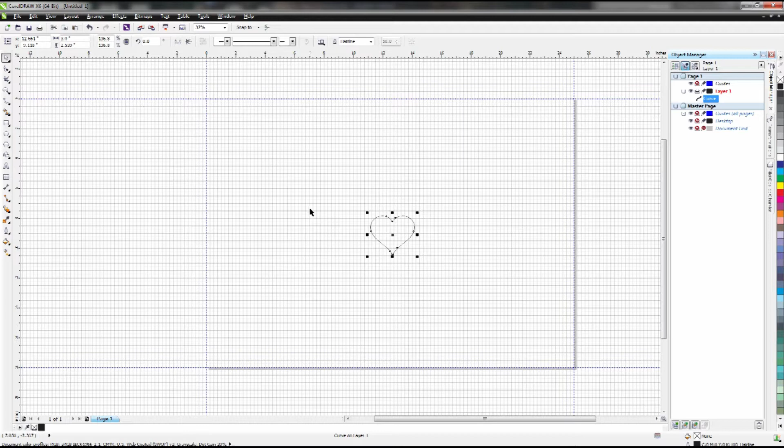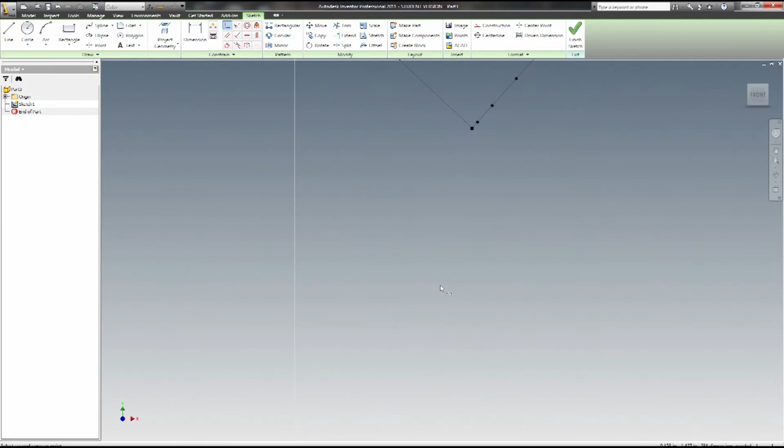But anyway, what I'm going to do here is open up and import the AutoCAD file. And there it is. Now I want this to be constrained. I'm going to say it's going to be here. Here... oh man, it took everything.

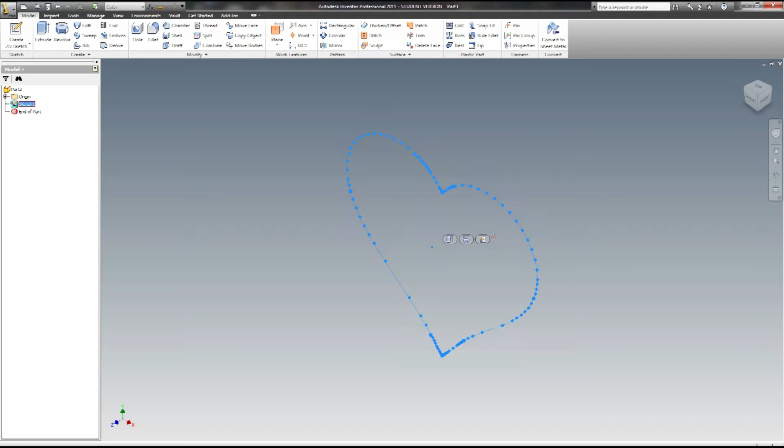Okay, that didn't work. I know what I need to do. So I'm going to finish the sketch to show you a problem. The idea here is to extrude this into a solid, but I can't, because for some reason when this vector was imported from the DXF file, it came up as an open shape, not a closed surface, I guess. So I've got to go back to sketch, and I have to use Sketch Doctor.

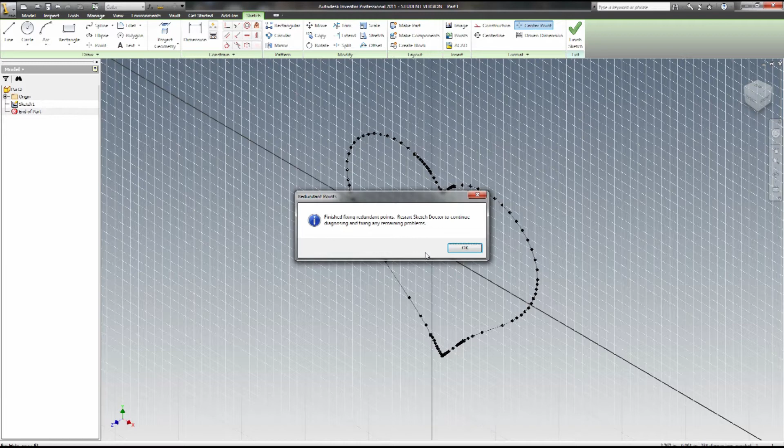I'm going to diagnose it. Just check for everything. It's going to find a bunch of missing items, so you just do next, finish, and now it starts asking if I want to add the points, and of course the answer is yes. But this could be hundreds, so I'm just going to press the Y key, and it'll keep going until it's done. I don't think it was hundreds in this case, but I've done it where it is hundreds, and when that happens, it takes a while pressing Y, Y, Y, and Y.

Okay, so what I'm trying to do here is move this so that this node is here. Really, it's not that important, but I'm kind of picky, so let's just do it. I have to deselect this, and now I'm going to constrain it.

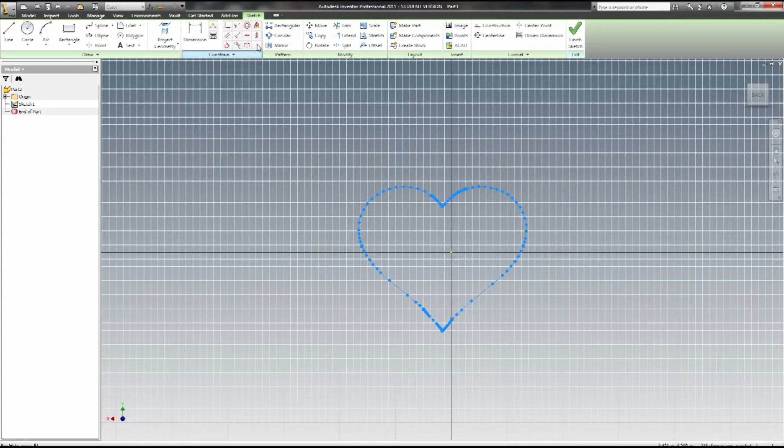This guy here. Man, that didn't work either. I don't think that's gonna work, so I'm just gonna forget about it. Now, if I want to extrude this, now I can.

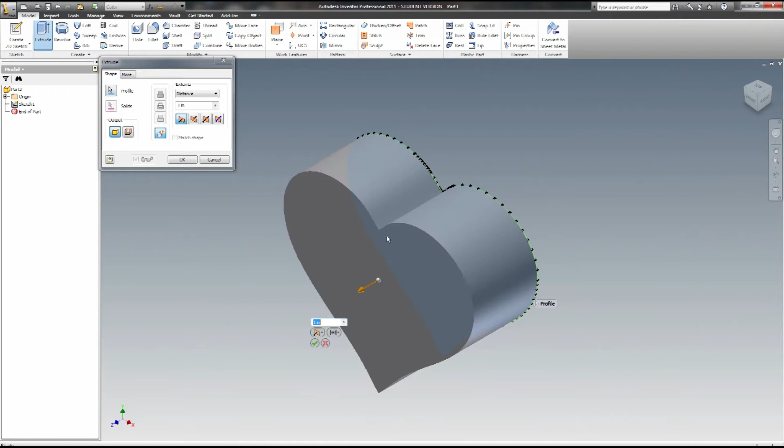Now I'm gonna say 0.25, because most likely that's the kind of aluminum that I'm gonna work with. Quarter of an inch.

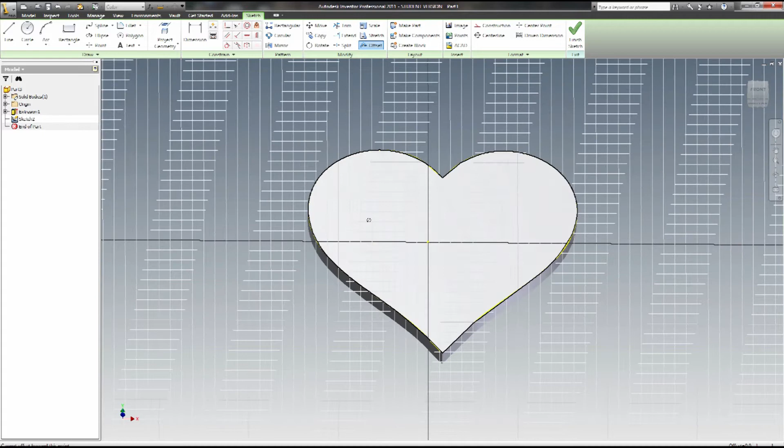Now, one thing that I would have wanted to do here, but unfortunately I cannot, is to create an offset. It doesn't let me. Apparently the shape is too convoluted, so I cannot create a smaller heart. That would have allowed us to make some fancy figures, but unfortunately it's not possible. I don't know why. I would definitely like to know why I cannot do that, but I guess it's because of the complexity of the shape, because most likely there are so many vectors in here that I guess it doesn't like it.

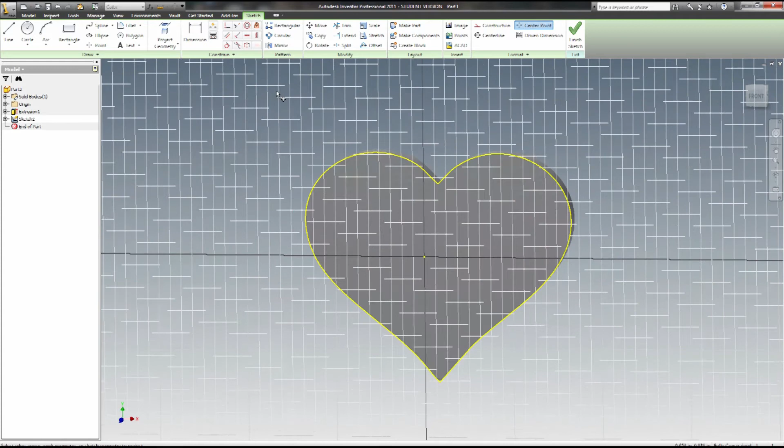Let me try something real quick just to see. I don't think that's gonna do it. Yeah, I think it's too complex.

Well, here is our part. I'm not gonna do much more here because this is just an example, and I am really not an artist. I don't even know if you can do super duper complex stuff with a bunch of curves here in Inventor.

Now the next step is basically to export this. Do not do a save as. A save as is not gonna give you the file format that you need. We need to do an export, and we have to choose IGES, or I don't know if any other format works. I have been using IGES, but maybe other formats work as well.

I have saved my file, my IGES file, and now I'm gonna go to SprutCAM. SprutCAM is the CAM, basically the computer-aided manufacturing.

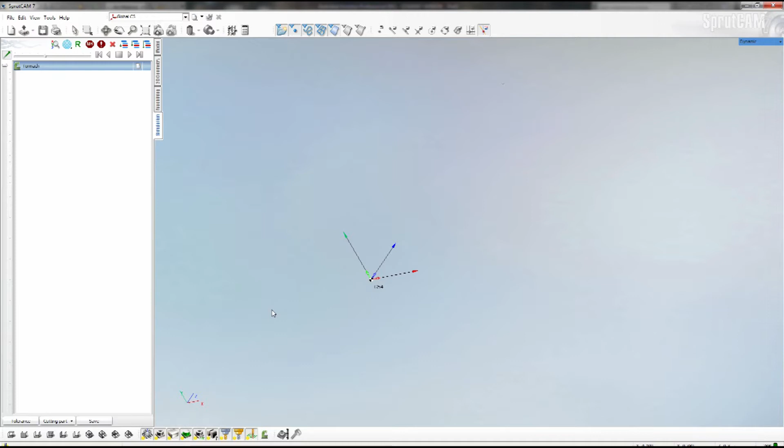So let me take a pause here to answer a very important CAM question. One of the questions I see the most out there on blogs and forums is, what is a good CAM software to use? What is a good computer-aided manufacturing piece of software to use on my CNC endeavors? The way I see this, there is no such thing as a good CAM software. What there is, is good CAMers, individuals capable of extracting the juices out of the CAM software they have chosen. The reason I reach this conclusion is because 3 years ago, before I started tinkering with CNC, I had this notion that the CNC software was magical enough for me to input one model, press one button, and voila, get this humongous list of G-code that will get the part manufactured.

Today our CAM software will in fact take a model and you'll press a button, but in between you'll have to fill a bunch of tasks to get the job done. For example, you're going to have to choose tools, algorithms, advances, speeds, feed rates, lines, curves, processes, and a bunch of parameters that must be selected properly for the CAMing process to work correctly. So this software, where we just press one button and the computer does everything, does not exist today. But it will be available in the future.

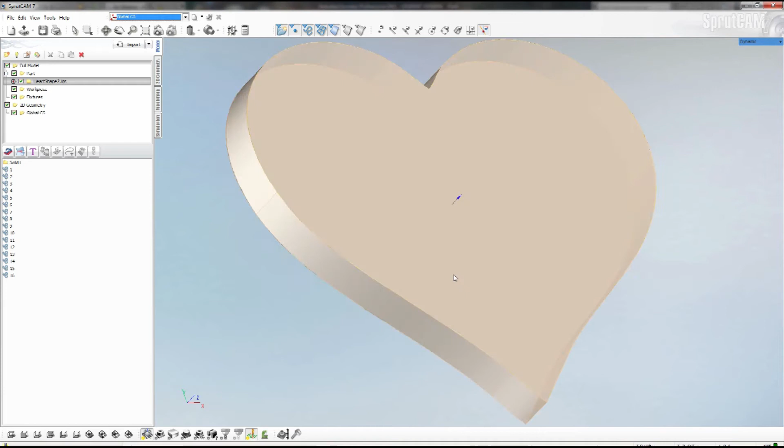Okay, I have imported the heart. I am not certain if I'm supposed to do this, a sewing, a sew operation. I think when you load the part, it's already complete, but I'm doing it anyway. I usually do it anyway, but whether it needs to be done or not, I'm not certain.

What I do need to do, however, is find my origin, my 0,0,0. And to do that, sometimes you have to do stuff like rotation, or you may even need to scale the part, or maybe you have to mirror it.

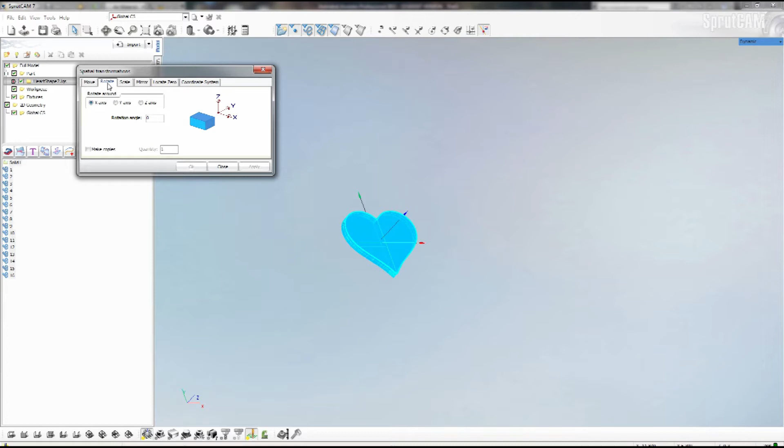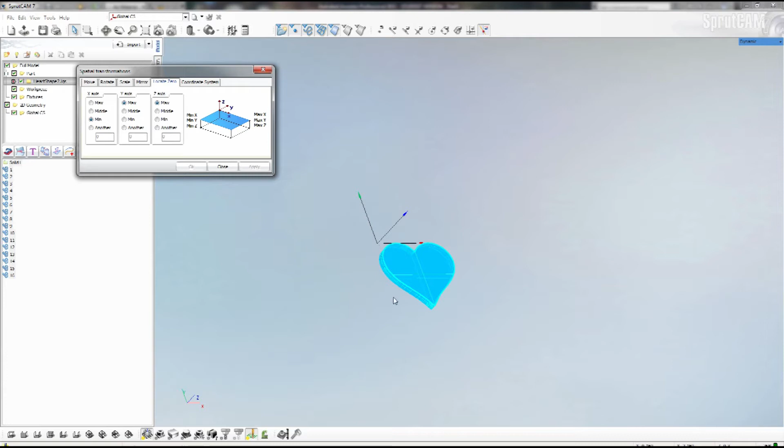Most of the time, the only thing I do is rotation if needed, if it's standing up and I want it laying on the vise, then locate the 0. I go for min, max, max, so my 000 is on the top left. The reason I like this origin - most people like the bottom left because then everything is positive, X positive, Y positive. It's kind of odd that I'm choosing top left because now I have negative Y and positive X. The only reason I've chosen this origin nomenclature is because this is what I'm accustomed to on the laser.

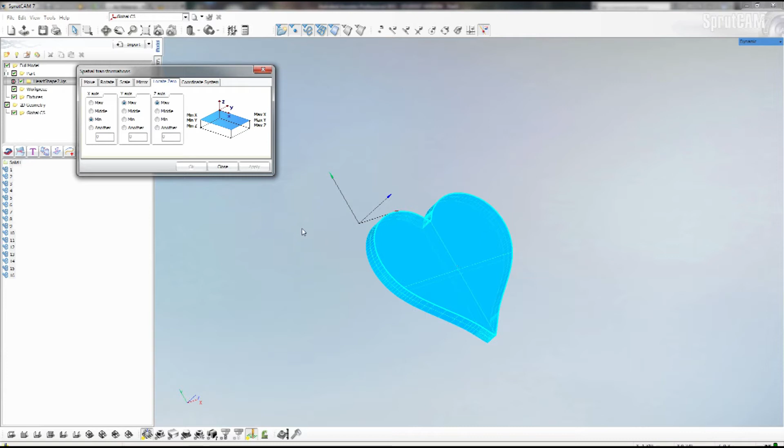On the laser, just because of how it's built, everything is positive on X and negative on Y. So I just inherited that, but it's up to you - you can even put it on the center if you want. There is no wrong way here. As long as you follow the origin from your cam into your machine, you'll be fine.

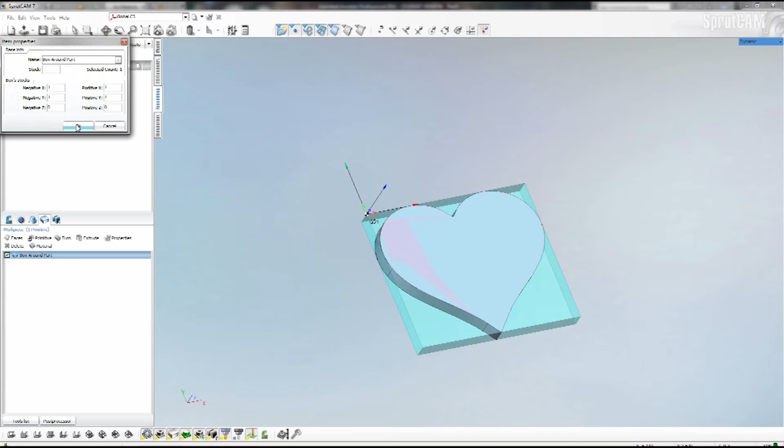So we're done here. Now I'm going to start by adding a workpiece - there's already one, but it's not going to let us see a lot. I'm going to go into workpiece and say primitive box. That didn't do much, let me adjust this. I think I have to add it and then double click, and now I can change the stock. I don't want anything on Z, I only want it on X and Y. There we go, now we have a nice piece of aluminum.

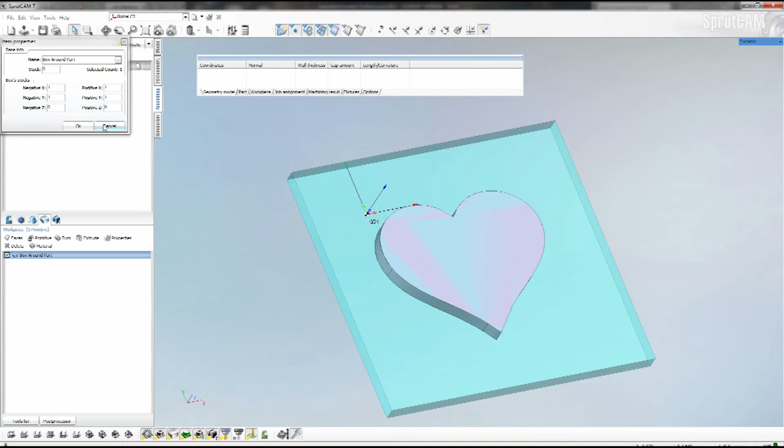Do notice that my origin is still here, so in theory you could move that if you wanted, but I know what I'm going to do, so that's no big deal. The only reason I added this workpiece is because I wanted to see the operations as they go across the heart shape, and without it, it becomes harder to see. But my actual workpiece isn't going to be this size - let's see how big this is with the measurement tool. I imagine this must be a 4x4 or something like that, but that's irrelevant.

The first thing we want to do is create a process for finishing 2D contouring - that's the process that's going to carve the contour of this shape. Now we need to actually select the shape. Well, look at that, it selected the whole thing - that is amazing. Basically you just double click on one of the lines and it selects the contour, then you go to your job assignment and press curve.

And that didn't work because for some reason it's trying to measure. That's intriguing, let me remove selected. Okay, let's do this with shift. Man, why is it measuring? That is the kind of stuff that really bugs me about this software. I don't want to measure, damn it. Okay, let's see if it works now. It doesn't.

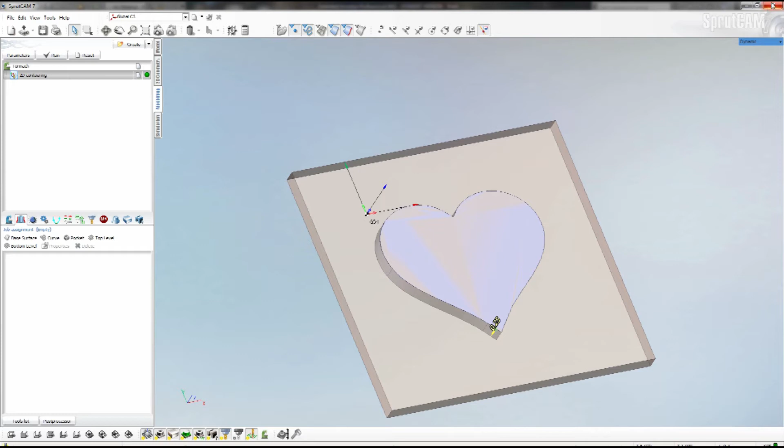Well, this pretty much means I'm going to have to close this and start from scratch because the software is doing something stupid which I cannot understand. So I'm just going to close it, and I'll return when I've gotten back to this point and we're ready to proceed.

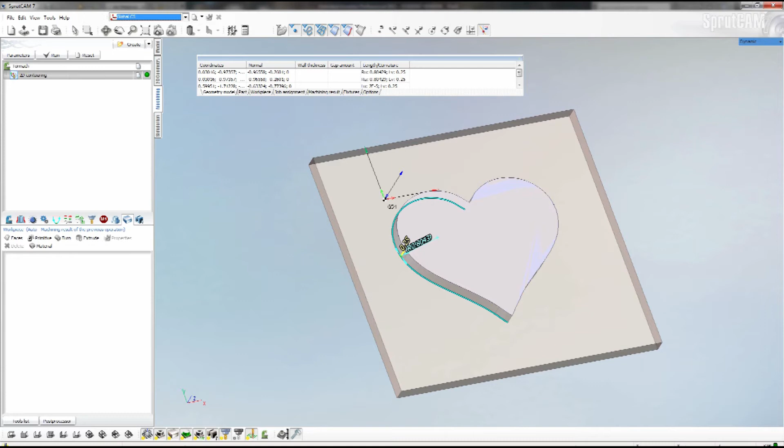All right, I am back, and in theory I should be able to select this. Man, it keeps doing the same thing - what am I doing wrong? You know what I think the problem is? I think the problem is this sketch.

Let's delete this sketch. I'm going to export this again and import it again, so I'll meet you on the export cam once more.

Alright guys, I am back. This is the third time I'm trying this, and I actually believe that the fact that I had a sketch on top of this that had nothing was messing up the cam software. It's kind of preposterous, but I think that was the problem.

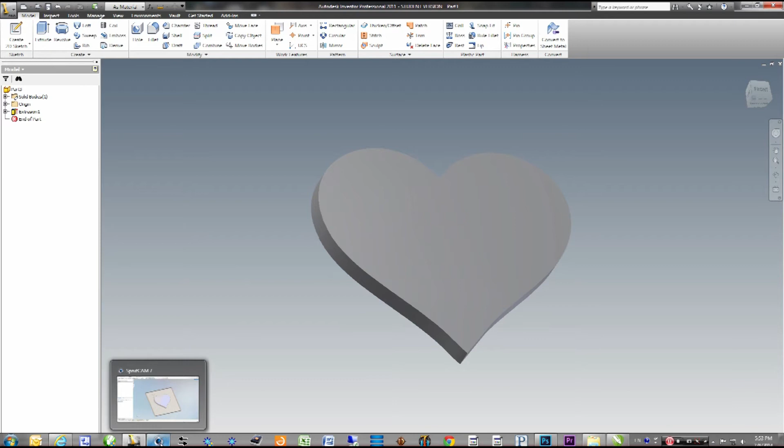Let's give this a try. So I'm going to create my 2D contouring, and now I'm going to select this, press control, select this, and now work curve - bam, now it works. Amazing, that truly baffles me. It seems like the lines on top of that meaningless sketch were confusing the cam software to this level. I mean, wow.

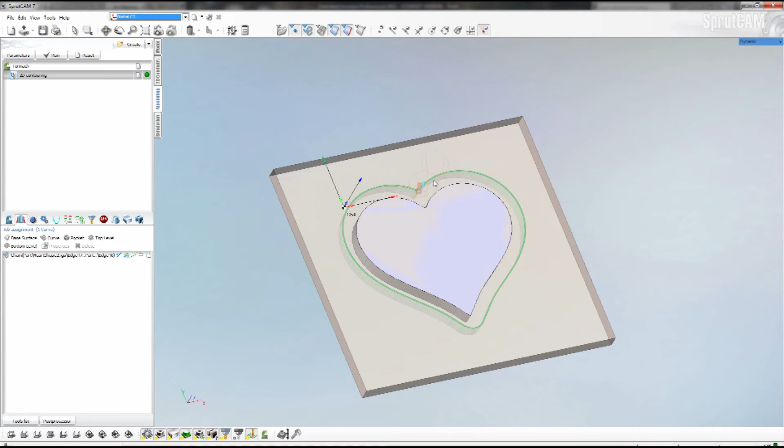Okay, now this is basically what the tool is going to do. As you can see, this is my mill - it's going to start here, end there, and just go all the way around. I'm not going to animate it yet because this isn't the tool I want to use. Now we have to select the tool. You'd imagine this thing knows what it needs to do, but not really - we have to tell it to. I'm going to select the end mill, it's going to be running at 1800 RPM.

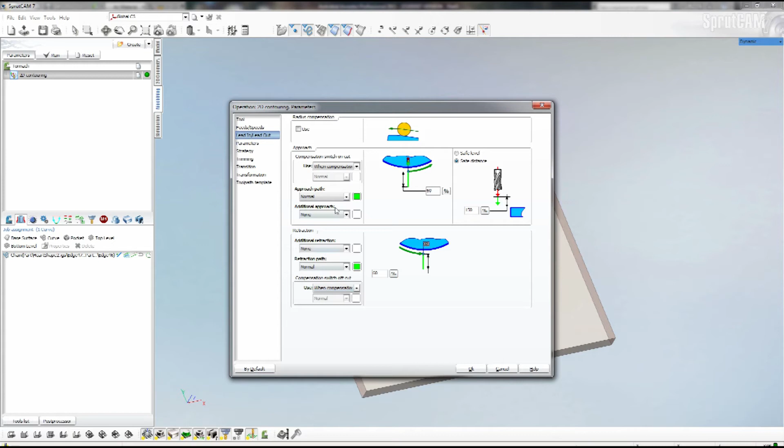That may be too fast, so let's go at 10. Let's do normal. The reason I like to do some approach is because otherwise it's gonna start right at the contour, and you may get a nick where it enters. But if you do a normal retraction, approach and retraction, then you get a better response.

Here is the safe plane. Top level is 0, and I'm not gonna go all the way. I'm gonna go to 0.225, or 225 mils, and I'm gonna leave 20 mils. I'll explain later why I want to do that.

I think 2 passes will be fine. Strategy is okay, trimming is okay, transition is okay, transformation is okay, and toolpath template is okay. Bam, that's our cut here.

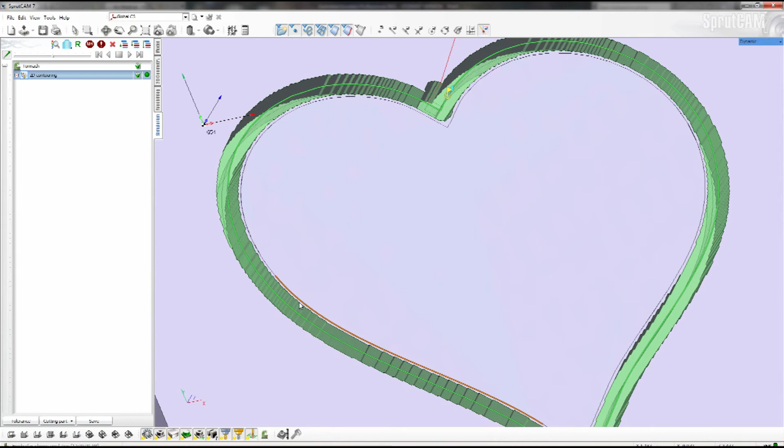So if I run it and do a simulation, we'll see that the cutter is gonna come down and it's going to cut the heart, but notice it's gonna leave a little bit stuck. Now the reason I like to do that is because I am basically making a groove in here.

So you're doing both, and you know, I'm not an expert. This is my impression, but I may be completely wrong, and I may actually be doing this wrong. So that must be why I'm doing these extra steps. Maybe if I had the right tools or the right speeds and feed rates, then it would work better.

But if I just try to cut to the line, because the mill is chattering a lot, trying to cut so much material, the finish is horrendous, pretty lousy. So what I'm gonna do is cut deep, far away from the line, and then cut into the line so I'm only removing a little bit. You can call this a roughing and a finishing operation.

So again, those have to be done by hand. The computer doesn't know, the system doesn't know that that's going to result in a poor finish. But I have seen it happen, so now I know.

So now I'm going to copy and paste this, and we're gonna go back to tool. We can do feed speed—I think that this will be fine. Now I'm going to do only 1 pass. I'm still gonna go to 0.225, and I haven't explained why yet. But now I'm going to remove the stock.

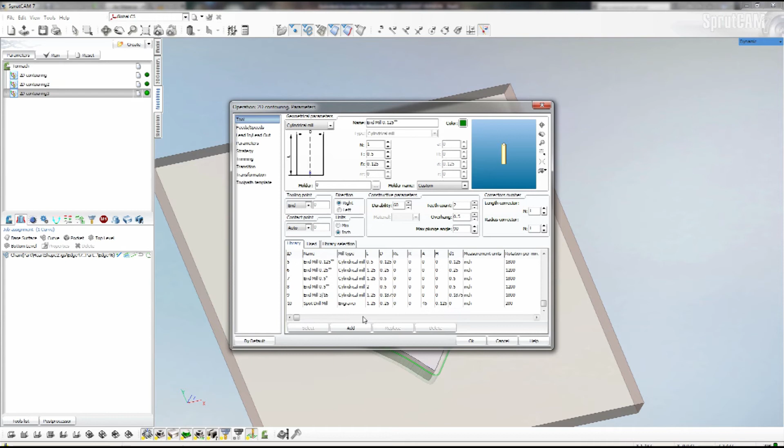Because I want to do a chamfer on this one, just to make it prettier. And for that I'm going to select my spot drill mill, select, and now I want the height to cut with, let's say 0.1, not too much—0.0625. Yeah, that's this green line, that's what it's gonna use to cut.

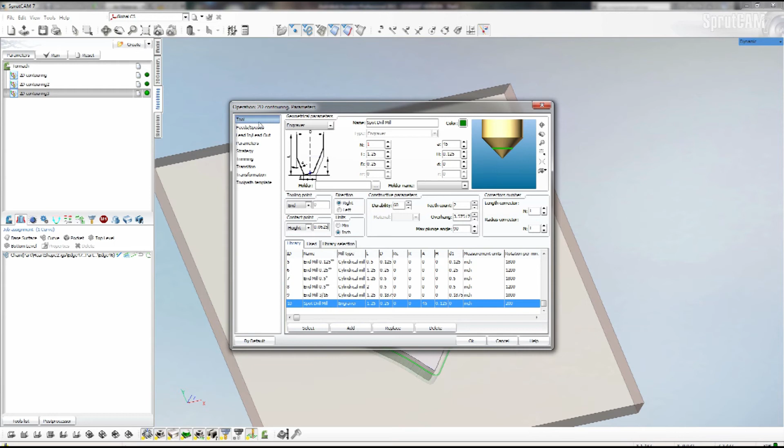Okay, now I'm gonna use 1800 again, hopefully that works. I'm gonna do 8. I'm gonna keep the same approaches. Now I have to be cautious here—I don't want to go down that much, so let's say 0.1.

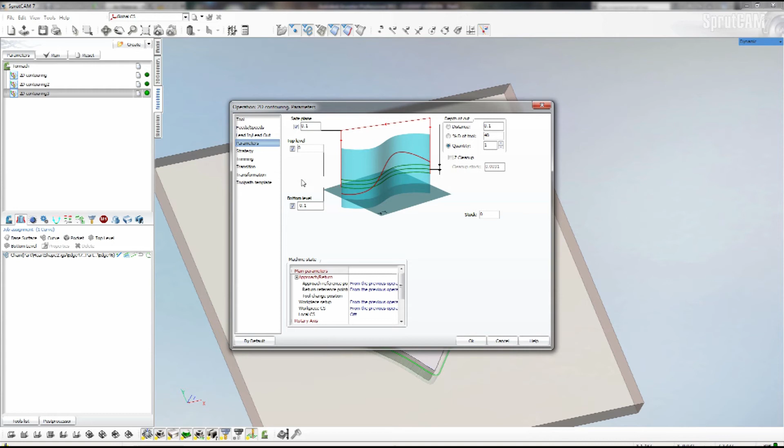And yeah, that works. Let's take a look at how this looks in the meantime. Let me speed this up a little bit. You have already seen this—cleaning up, and now we're doing the chamfering.

The chamfering is not going to show a lot because that's not part of the model, but you'll see it will cut until here. I think that's good enough. And it's going to throw a warning because obviously it's doing something it shouldn't—it's basically cutting, I mean, I'm telling it to, but the model doesn't say you're supposed to do this.

So we're going deeper than we were supposed to. We're removing material we were not supposed to remove. So I don't think the software likes that, unfortunately. Okay, now we have done the great majority. Let me take this back.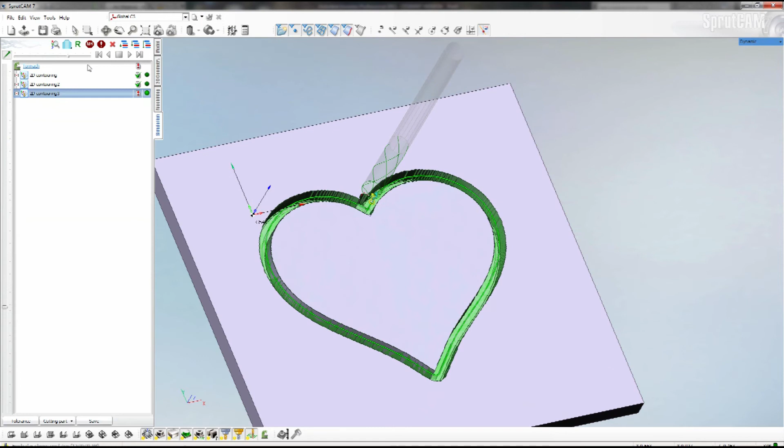We have done most of the carving. What we need to do now is release the heart from the block of aluminum. If I do that in a single blow, when there is very little aluminum left, the heart is going to start vibrating in place, and most likely it's going to come in contact with the blade and look ugly. So what I like to do is leave some tabs.

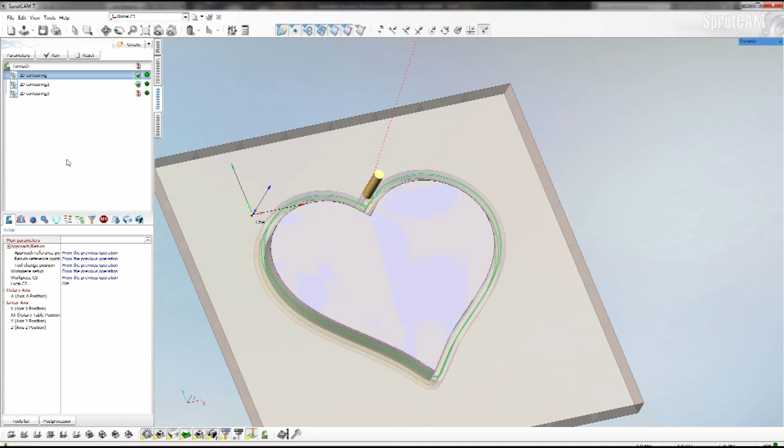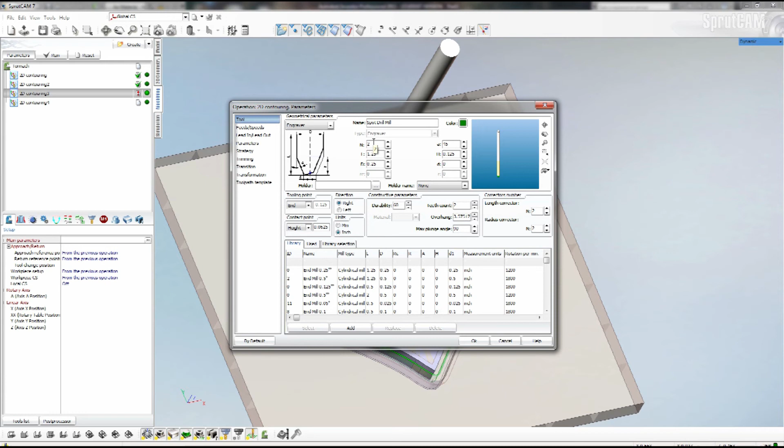Now I'm going to copy this guy and paste it down there. But before I do this, I cannot forget to name this tool number 2, otherwise it's not going to change the tool and the program will just go and it'll be a mess. So remember to change the tool number whenever you want to specify a new tool change.

Okay, so this guy is going to be tool number 3, and everything else is okay. But now I'm going to go all the way, taking it a little bit more. It doesn't matter about the depth, basically I'm just going to go all the way, so it really doesn't matter if it's below. This pretty much ensures that you're going to go all the way.

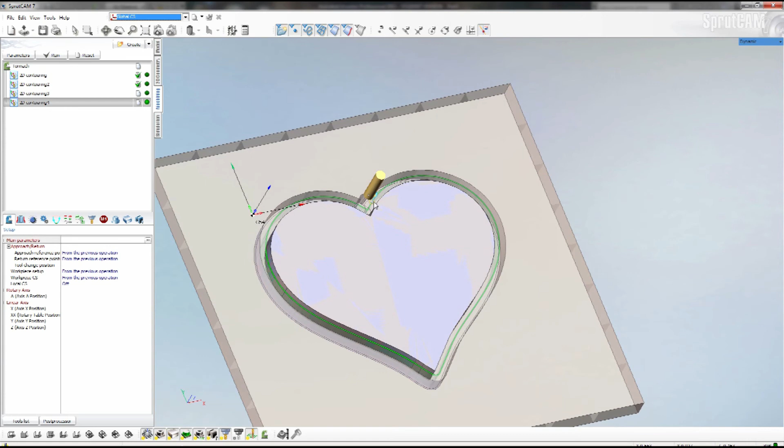But what we need to do now is move it. Let's see if it lets me grab this... guess I have to select this guy. There we go. No, it's not letting me grab it. I hate it when that happens. Darn it.

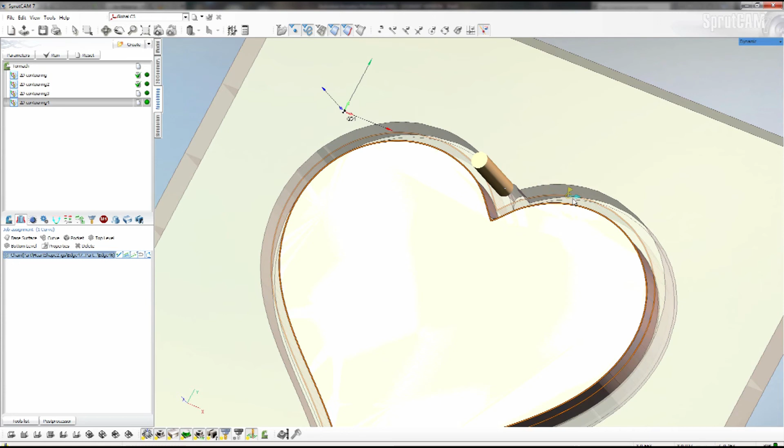Yet another one of the annoyances of CAM. In theory, I'm supposed... there we go. Darn it, I don't even know how I managed that to happen. I know it can be done. How I did it beats me.

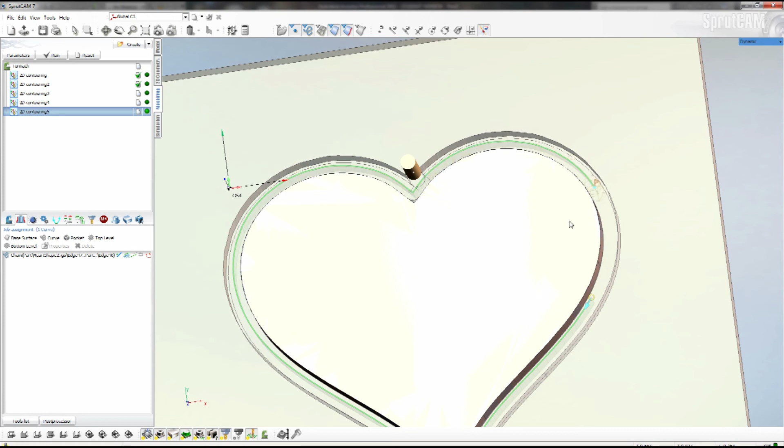Okay, now I'm going to copy this guy again, copy, paste. But now I'm going to do the other side. I guess I have to go a little bit in here, and well, I guess I have to do it like this. Oh man, how do I do this? Yep, like this. There we go.

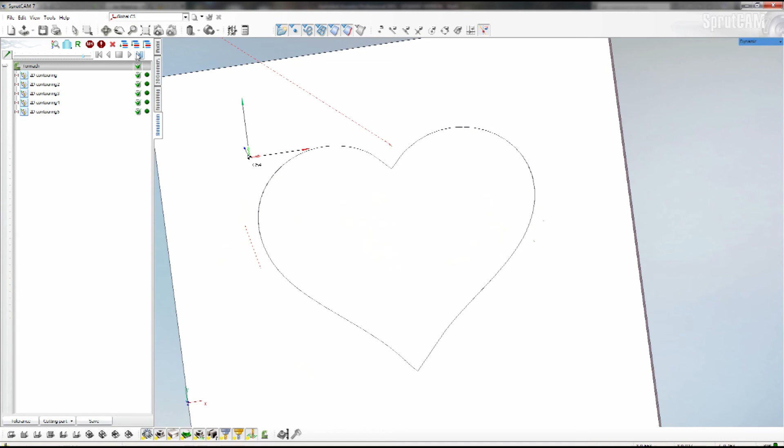Now I don't even remember where these guys were, which means I don't know how big the tabs are. We're going to have to run this continuously until we get a tab small enough. Let's do this very fast. Okay, those are my tabs, so I guess I can make this one smaller. Let me just move that a little bit, like that.

I guess I have to clean that up. Let's do reset, run.

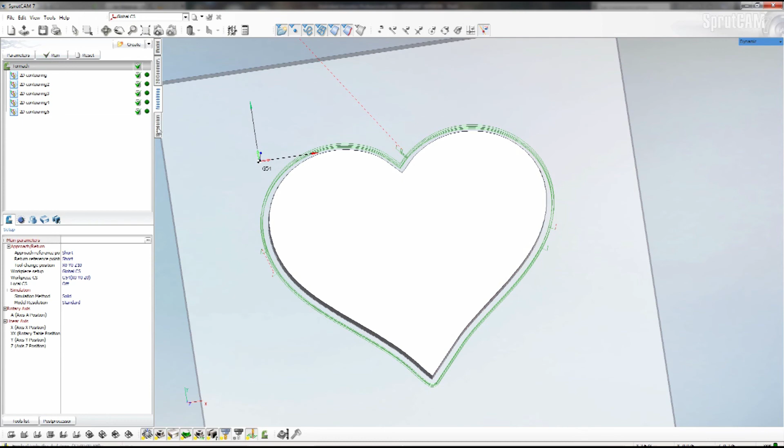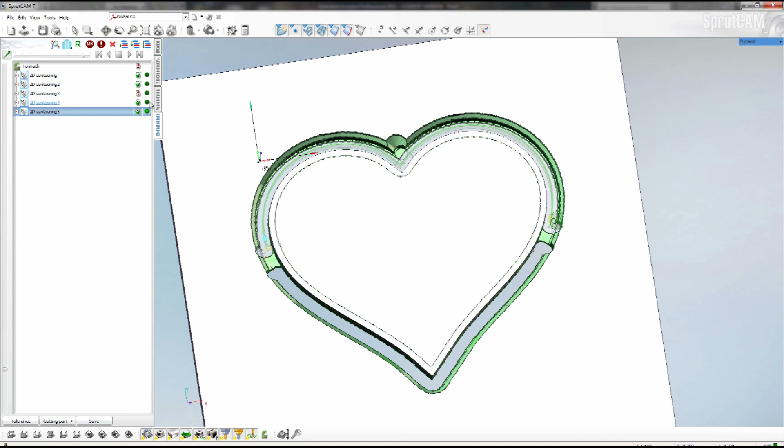Okay, and then of course you would use a saw to segment this and a sander or a file to clean the sides up a little bit. So look at this: one, two, three, four, five processes to do our super simple heart. If we wanted to make a more complex heart, you can imagine the level of complexity we would need to put into this.

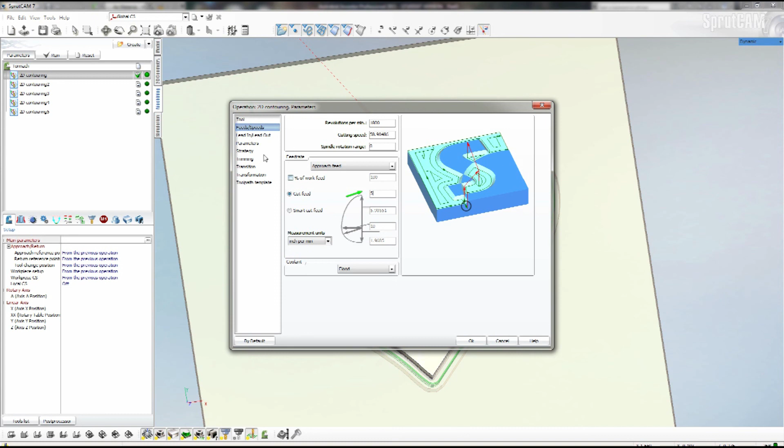Inside each one of these processes we had to specify which tool we wanted to use, the speed, the cut feed. You can also change the approach feed—if it's going too fast, I usually like to approach at a smaller rate. There's the lead in and lead out, and a gazillion parameters I didn't even touch here, because the machine doesn't know where it can go, so you have to tell it the safe plane, the top level, the bottom level, how many cuts you want, or the depth of cut. If you want the stock, you have to specify that too.

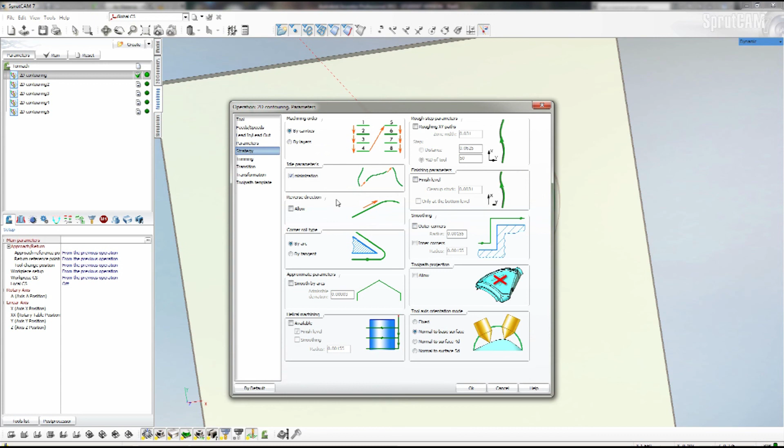The strategy I didn't touch because pretty much everything in here works for me, but look at this—how many tabs do we have in here? Trimming, transition, transformation, and if you want to add auxiliary commands, this can get very complex. And that's only the 2D contouring—there's also holes, waterline, drive, plane, hole machining, pocketing. Look at this, this is truly not a piece of cake.

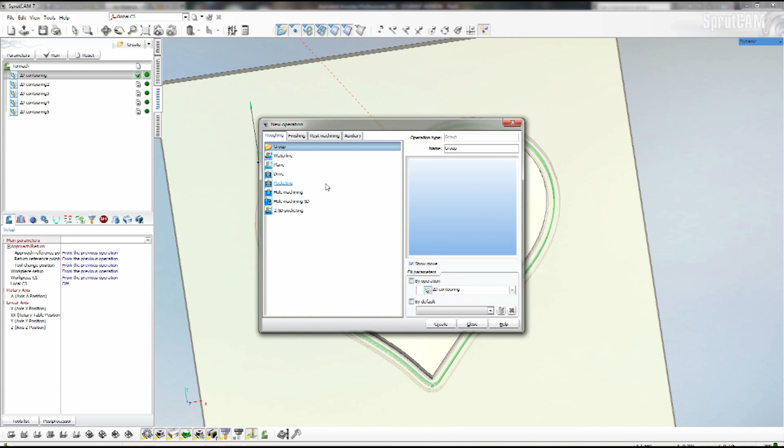It took me months to be able to make something, and even today I have to come back to the CAM process continuously, just because I don't do this enough and I forget the right parameters, so I have to retry them again. Making these videos is great for me, because three months down the road I'll have to make something similar and I'll wonder what worked for me—most likely it's going to be on this video, so I'll watch it again and say, oh well, I'm just going to copy these parameters.

So this is half of the process. We basically drew the heart, got the model, and did the camming. Now we have to go into the machine, but I think this has been long enough, so I'll do that in a separate video.